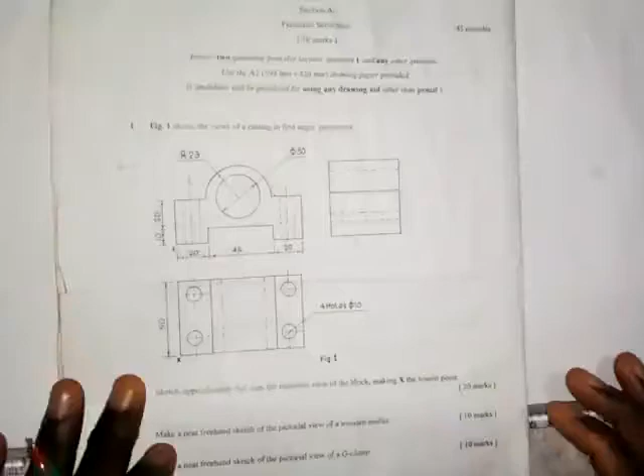All right, this is another question that you want to work on. This is given in orthographic views. These are orthographic views, and the candidates that wrote this particular paper were asked to sketch the isometric view of this object, putting these views together to get an isometric view of the object.

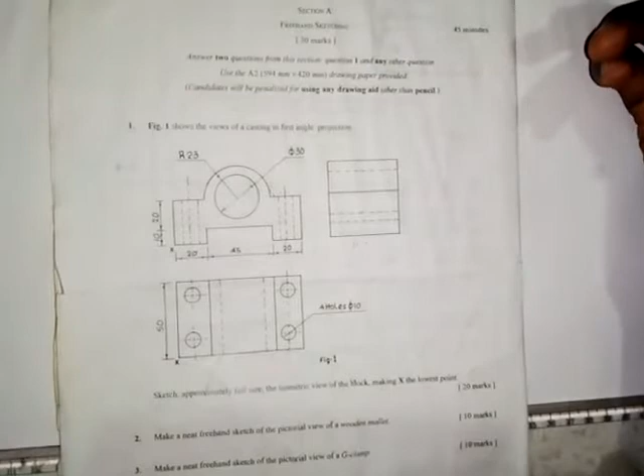So what I want to do here is to use the instrument to produce the isometric view. Looking at what we have here, we are told that figure 1 shows the views of a casting in first angle projection. Here they said sketch approximately full size the isometric view of the block, making X the lowest point.

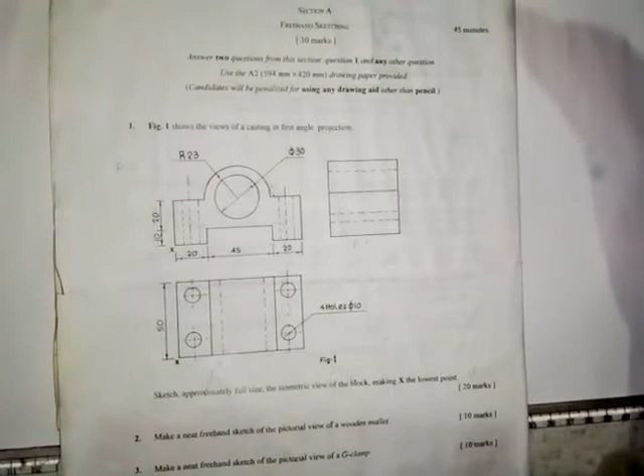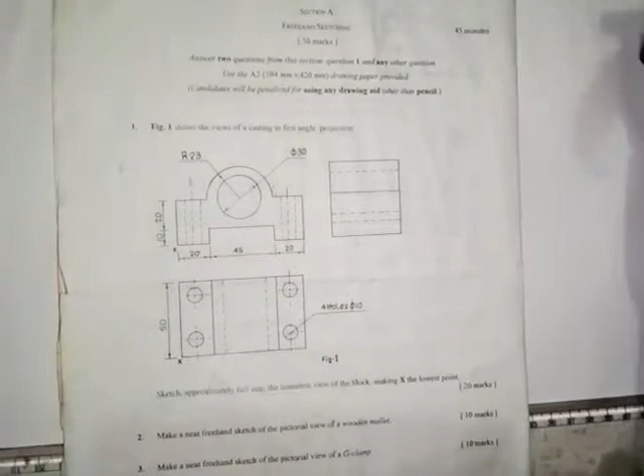So we are not doing sketching here. We are not doing freehand sketching. I've done the freehand sketching of this. Now I want to use instrument to produce its isometric view, because from experience, as I said before, I've seen where a question given to some candidate to sketch free-handed was also used in another year, where they should use instrument to produce its isometric view. That is the reason why I want to show you how you can use instrument to produce the isometric view of this object.

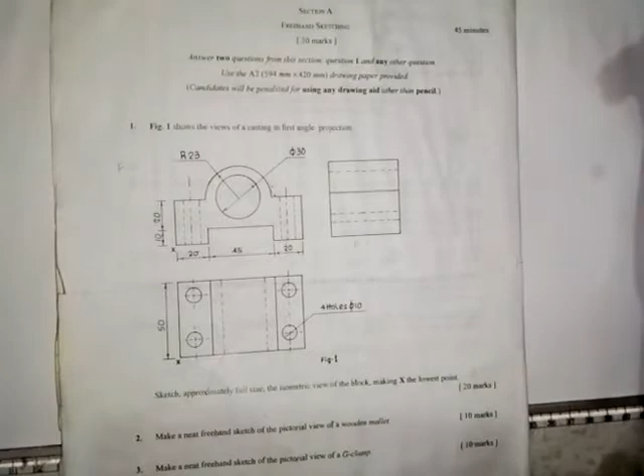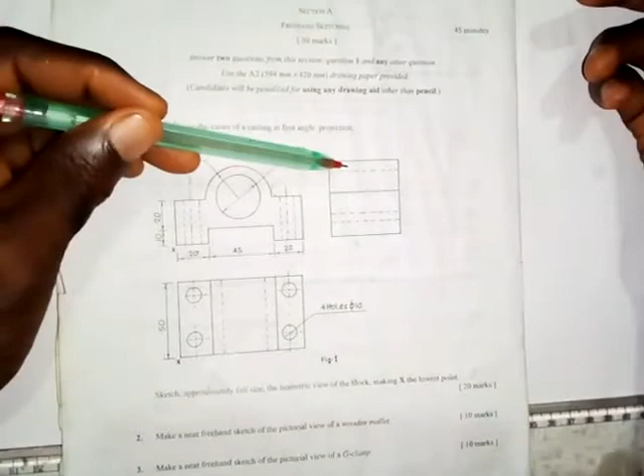Now let's look at what we are going to do here with these views given to us. As you can see, this is given to us in first angle projection. It means that this is the front elevation or front view, this is the top view or plan, and this is the end view or side view. That is what we have here.

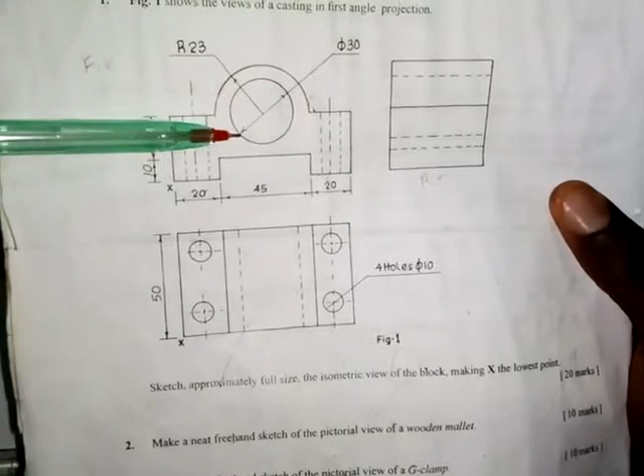Now here we have that the distance from here to here is 20 millimeters, from here to here is 45, from here to here is 20. If we add this together, this will give us 85 millimeters. The distance from here to here is 10, from here to here is 20, so the radius of this circle is 23. The diameter of this circle as given here is 30 millimeters, that means the radius is 15 millimeters for this circle, while this semicircle, the radius is 23 millimeters, as you can see here.

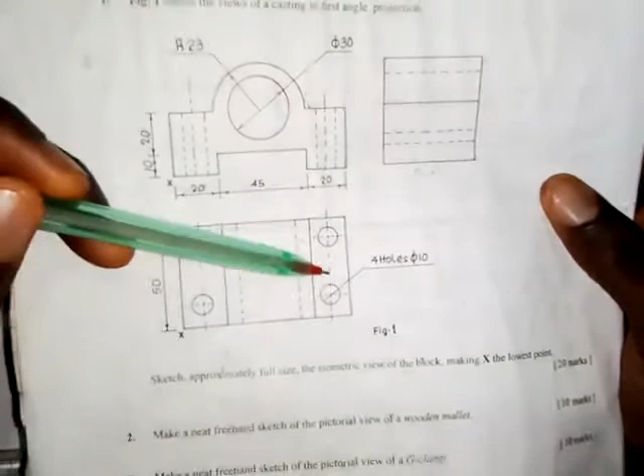Now coming down to the plan here, the distance from here to here is 50 millimeters. For these 4 holes that we have here, we are told that the 4 holes' diameter is 10. So these are the things that we have to put together to produce the isometric view of this object.

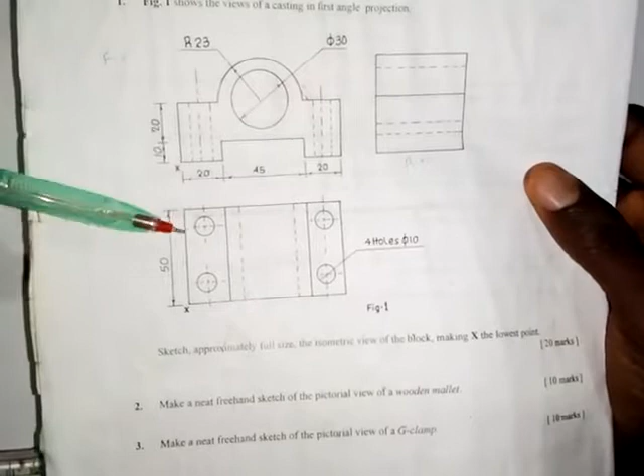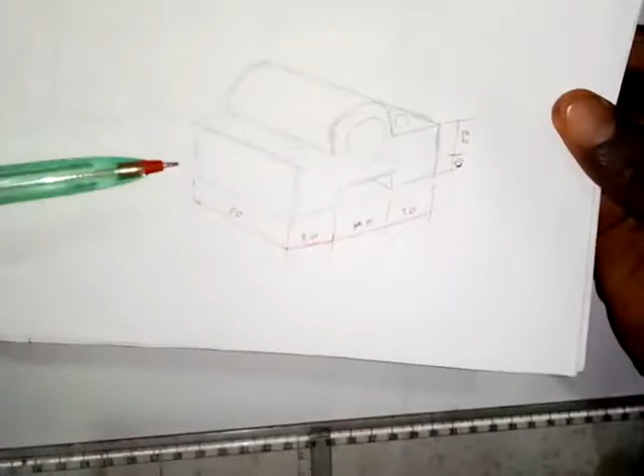In every video that I produce on isometric drawing, when we are converting orthographic to isometric, I usually say that when you are given the views like this, make sure you produce or sketch its isometric view, which will enable you to get the work done quickly. That is what I have done here. This is what we want to produce. So I'll be using this, coupled with the question given, to produce the object.

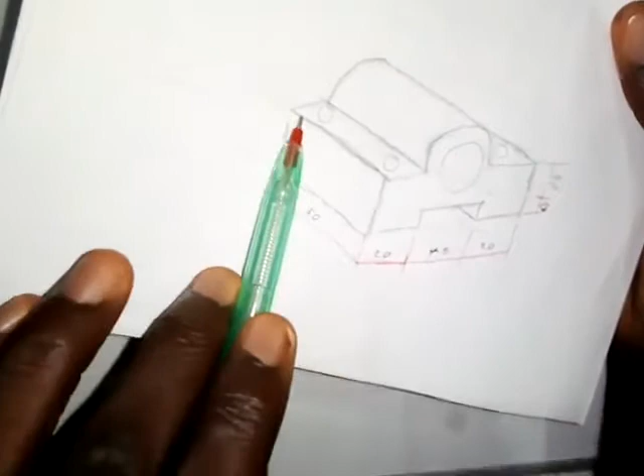So let's start. The first thing that you need to do here is to draw a horizontal line like this. Now, after that, with your 30-degree set square, the first thing I want to do here is to produce the base. Without this, I'll produce the base first, then I will go on and produce it. So let's start with the base. With your 30-degree set square, draw a line in this direction, then also draw a line.

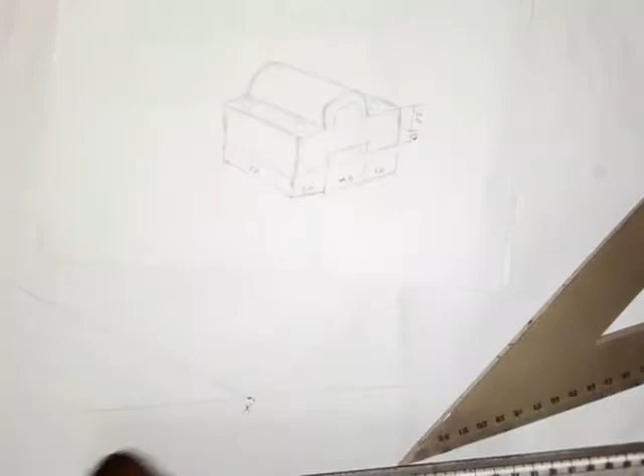From here in this direction, this is point X, which we are asked to make the lowest point. So this is where we have point X in this diagram now.

The distance from here to here is 20, from here to here is 45, from here to here is 20. So that is 85 millimeters. Take a measurement of 85 millimeters from here.

Then on this side here, this is 50 millimeters. Take a measurement of 50 millimeters from point X to the left side. Then draw a vertical line at this point X, here also draw a vertical line, and here draw a vertical line like this.

Now the height, as given here, from here to here is 30 millimeters. This is 10 millimeters, and this is 20. So 10 plus 20 gives us 30. Take a measurement of 30 millimeters here.

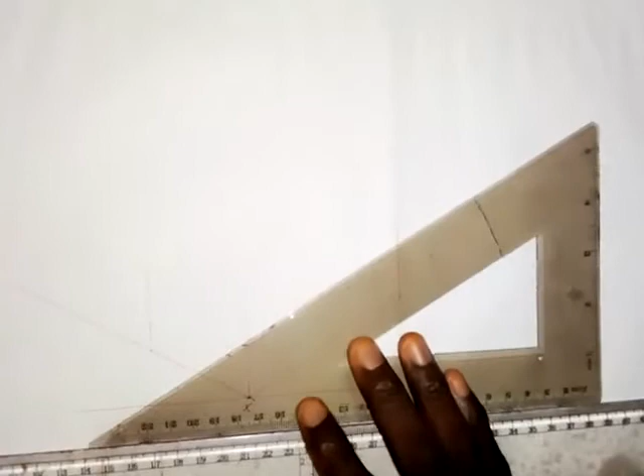Transfer this to this side. Also transfer this to this side. Then we transfer this one to this side. Transfer from here to the other side like this.

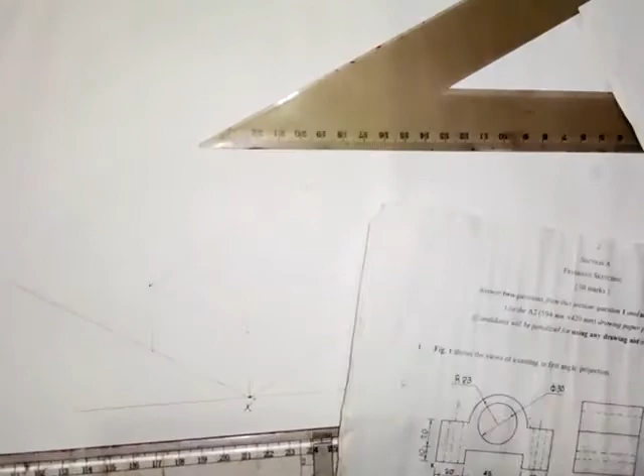The distance from here to here is 10 millimeters, from here to here is 10 millimeters for this recess. So we take a measurement of 10 millimeters from here.

Then I'm going to take 20 millimeters from this point X. So from here also I will produce, this is also 20 millimeters.

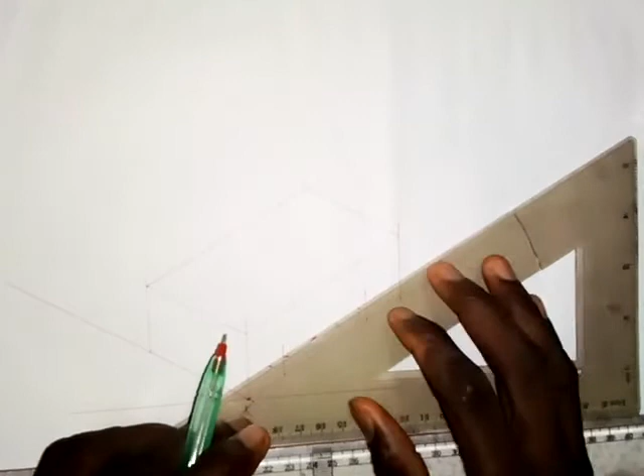We draw a vertical line, a short vertical line here, and also a short vertical line here. Then from this 10 here, so I will draw this.

Then we are going to see a line, as you can see here. So this line here that goes inward, we are going to produce it. So there it is, like this.

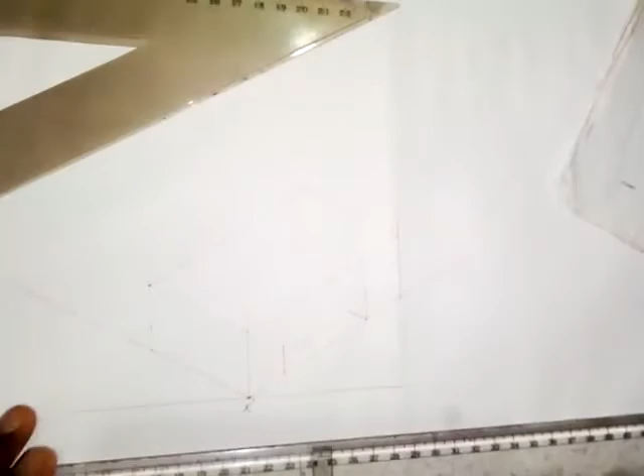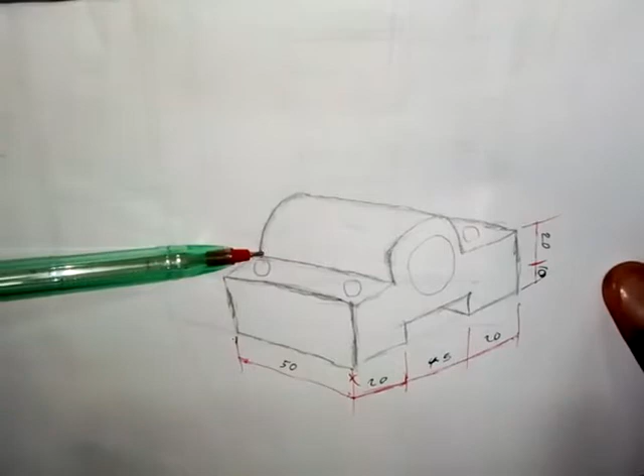The next thing I want to do here is to produce this semicircle that we have here. First of all, I will start with this part, because for this part you only see a little part of it, or small part of it. So I'll first produce this one, then move on and produce this. Later I will produce this circle.

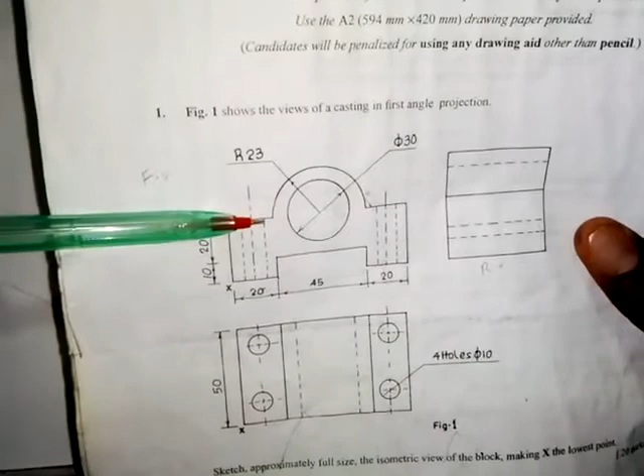Don't forget that the radius of this semicircle is 23 millimeters, which means the diameter is 46 millimeters. So what I'm going to do is, as we know the distance from here to here is 85 millimeters, if we divide 85 by 2, that gives us 42 and a half millimeters.

So I'm going to divide this into 2 to get that 42.5, so 42 and a half. So there it is. I'll transfer this to the front like this.

Then I will take 23 to the left, and also 23 to the right here. So 23 from here. So this is 23.

I'm going to erect a vertical line here, so erect a vertical line here. Here also I will erect a vertical line.

Then I will take a measurement of 23 millimeters up. So this is 23. I'll transfer this to the other side.

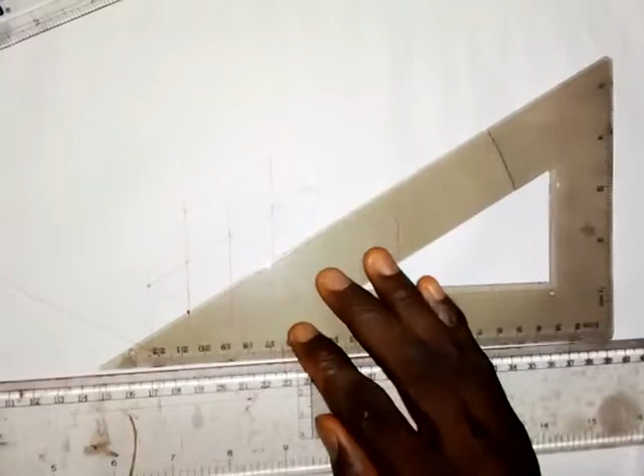Then I will take 23 millimeters down from this point, 23 millimeters. I'll transfer this to the other side, transfer this to the other side like this.

The next thing I'm going to do is join this point here, this middle point, with this point. Here, I want to produce that semicircle.

So then this point I will join it to this point. Join this point together with this. Then I will join this point here together with this point.

The next thing I'm going to do here is to take my compass, putting it at this point here, putting it at this point and extending it to this point.

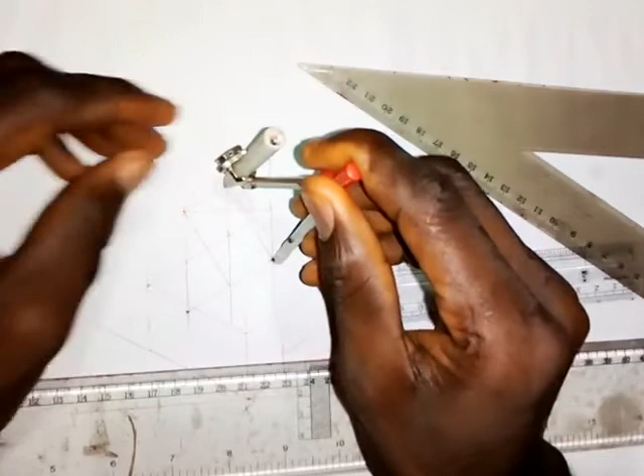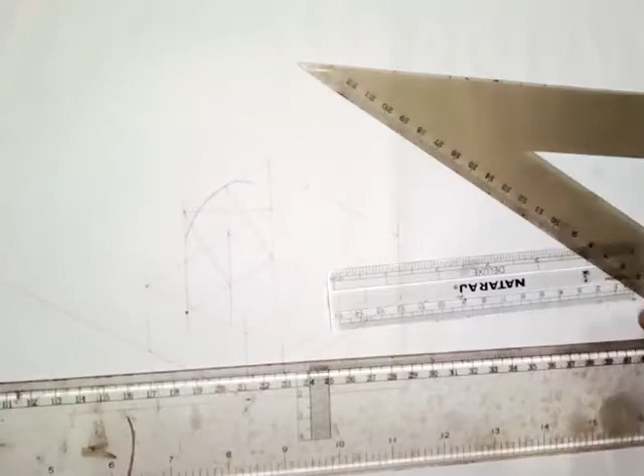So I'm going to draw a curve like this. So I believe you can see the way I did it. So then I will put the pinpoint of my compass at this point, extend it here. Then I will produce just a little part, I don't need it all. So I've drawn part of this, the little one that I need. So here I'll just bring this down to this point here.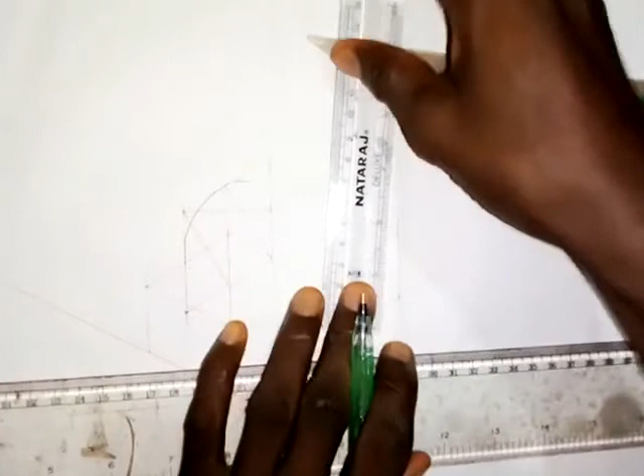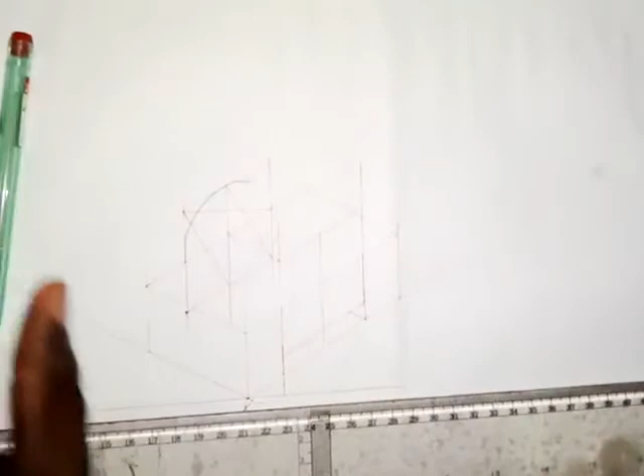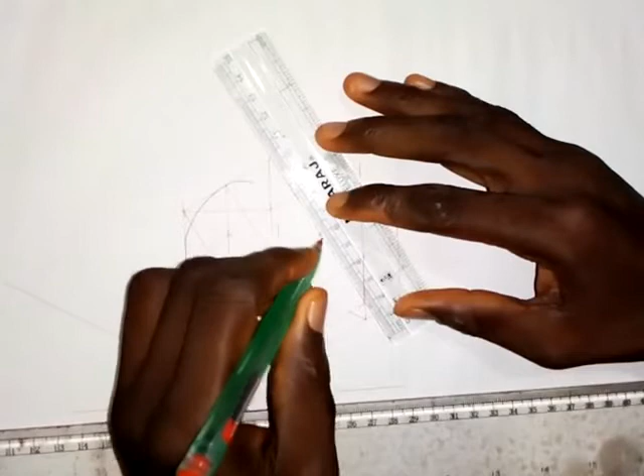Alright, so the next thing that I want to do now is to produce the semicircle at the front. So I will do the same thing that I did for this part, just to produce this square here. So I will do that while I pause the video. Alright, so I've produced the square here. So the next thing that I want to do is to join this point in the middle here to this point here. So join this together, and I will join this point and this point together like this. Then I will join this point here, this point here, together with this.

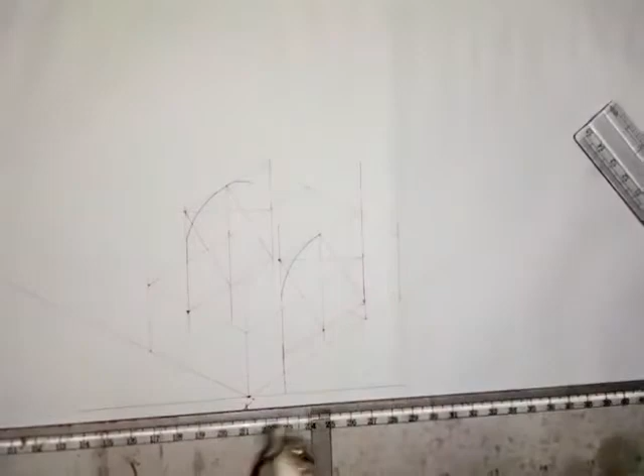Alright, so then the next thing that I want to do here is to produce the semicircle. So I put the point on my compass here, extend it to this point here. So I draw this like this. Then I will put the pinpoint on my compass at this point here, because we are going to see the whole of this semicircle on this part here. Okay, so we have this. Alright, so we have drawn the semicircle.

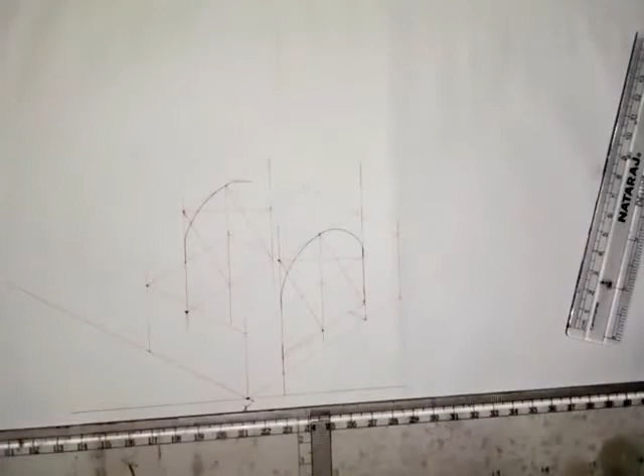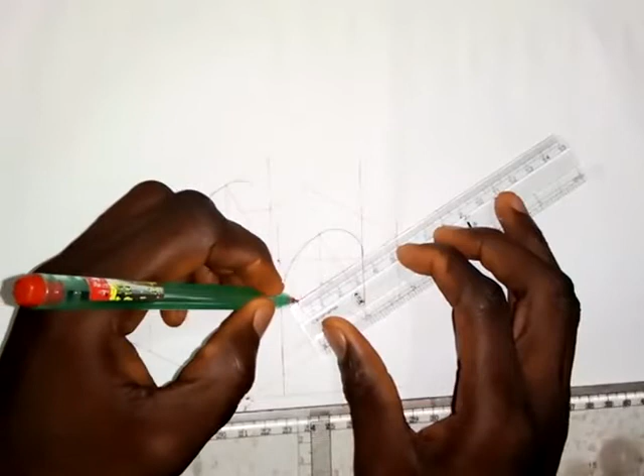So the next thing to do is to draw the circle itself, that is this circle. We have to draw this circle, and we are told that the diameter of this circle is 30. That means the radius is 15 millimeters. So from this center here, we take 15 millimeters to the left, 15 millimeters to the right. Then we take 15 millimeters from the center, 15 millimeters down, and 15 millimeters up. Then we form a square.

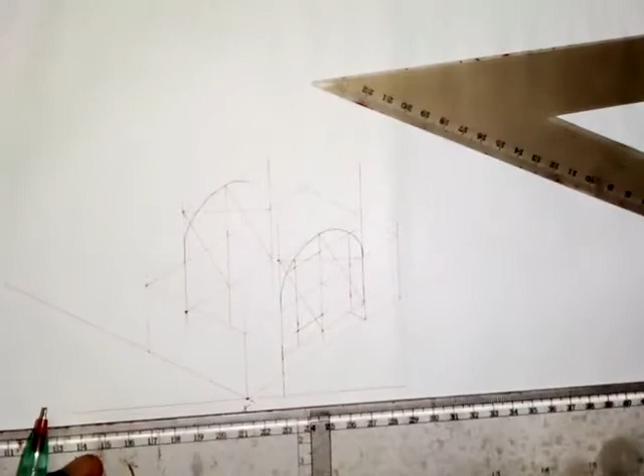So we form a square like this. So I draw a vertical line here, like this. Then I will draw this line this side, and this line to this side. I'm not sure, I'm looking at this as if this is less than 15. It is less than 15. This is where we have 15. I think it was a mistake.

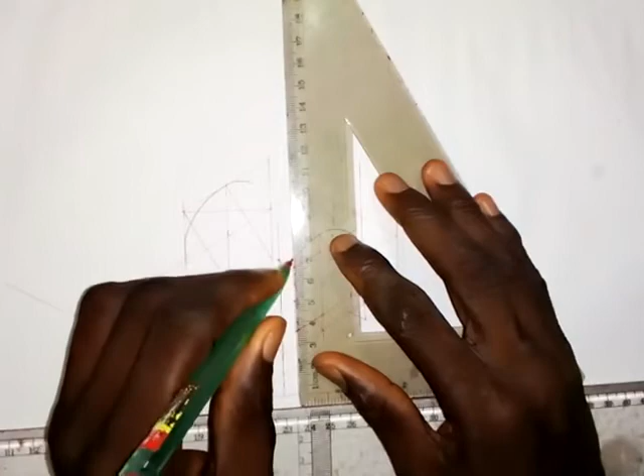Okay, so I need to join this. So we have these 4 points now. So here, let me call this point A. I want to use the 4 center method. This is point A, this is point B, this is point C, and this is point D here.

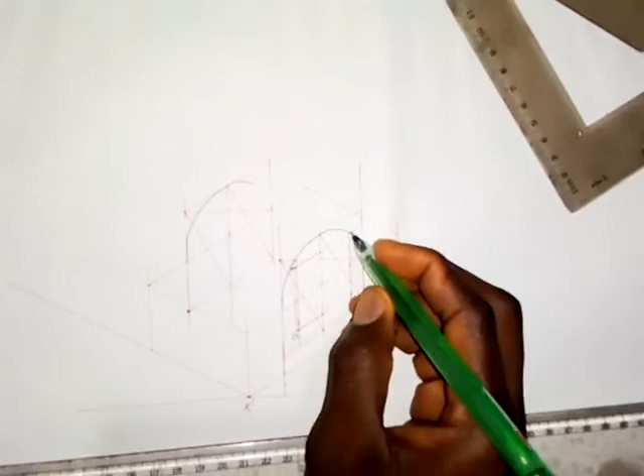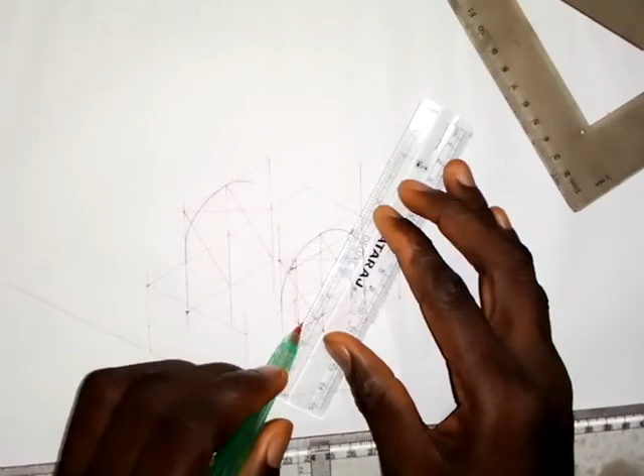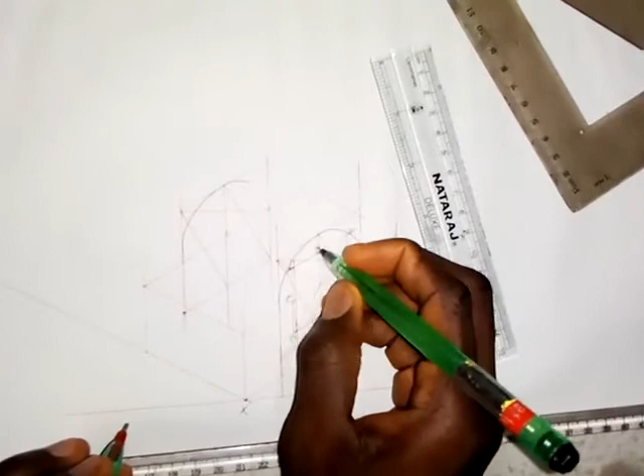So I will join B and D together, the straight line. Then I will join. So this is point E, this is F, this is G, and this is point H. So I will join C and H together. Join C and H together. Then I will join C and E together. So join C and E together, so the work may look rough.

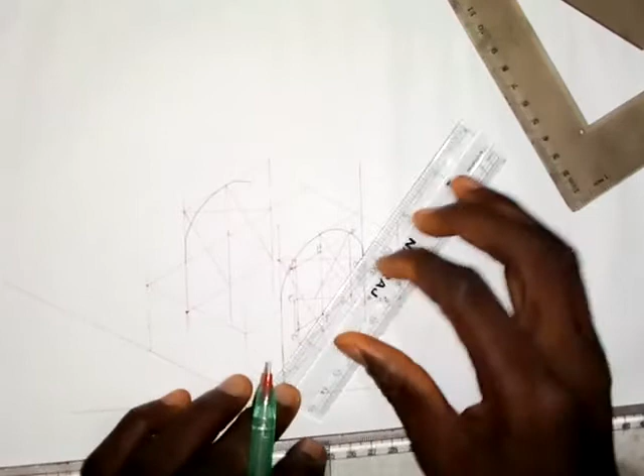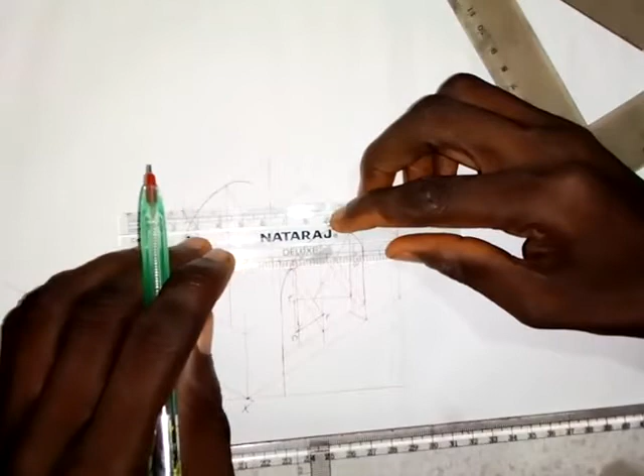Joining CE together. Then I will join... so I will join GF together. Sorry, I will join AF together. So join AF together like this. Then AG, I join AG together.

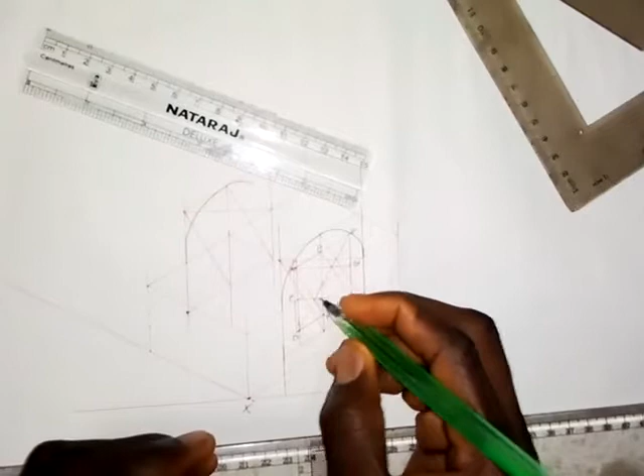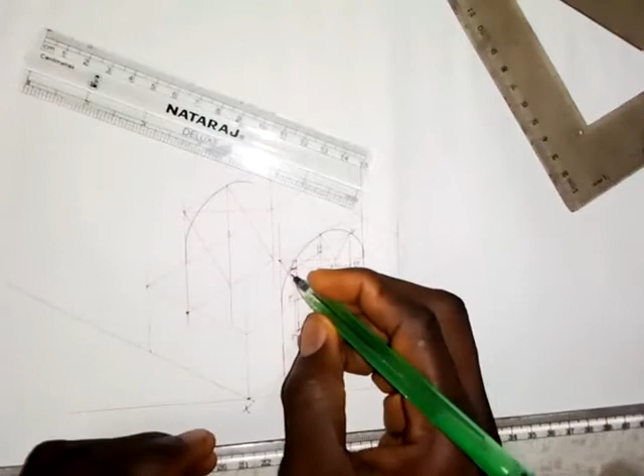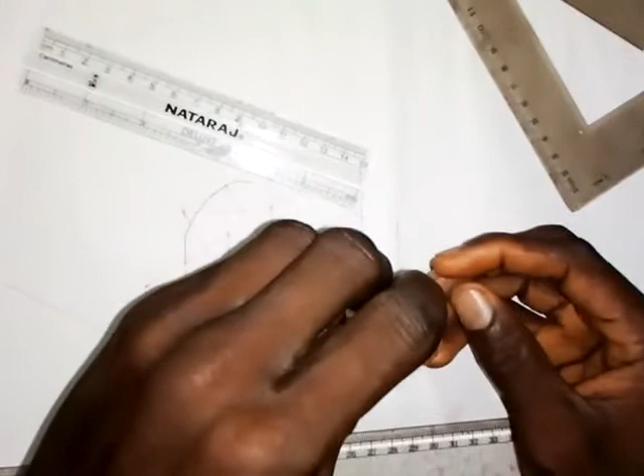Okay, so we have the 4 centers now. So this point here, and this point here. So this is center 1, this is center 2, this is center 3, and this is center 4. So we have those centers. So I put the pinpoint on my compass at this point here, extend to F here. Then I will draw an arc like this.

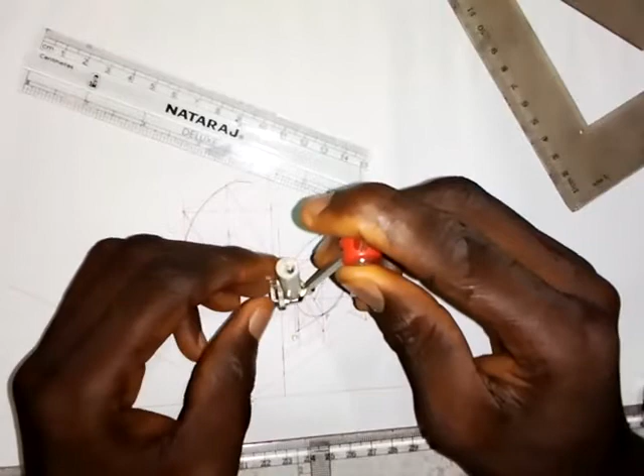Okay. So draw an arc like this. So the same radius at this point 2 here. Extend to, so I will draw an arc like this. Then I will put it at this point A here, which is point center 3. So extend it to F, then I will draw an arc. So draw an arc like this. Okay. Then I put it at this point here. So extend it here. So draw an arc like this.

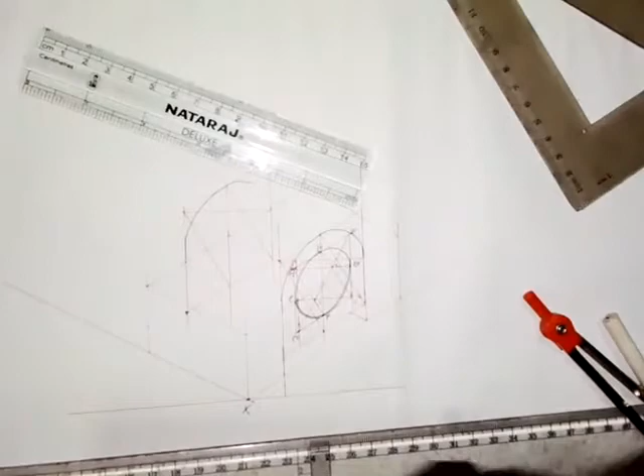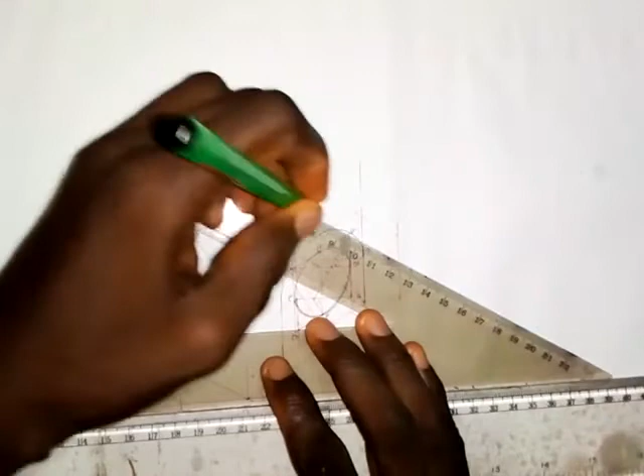Okay, so that is the circle. So we have drawn the circle. So the next thing that I'm going to do here is to join this point together. So I join this together with this. So join this together. Okay, so the work is coming out little by little. Then this point, I will join them together. So join this point together like this.

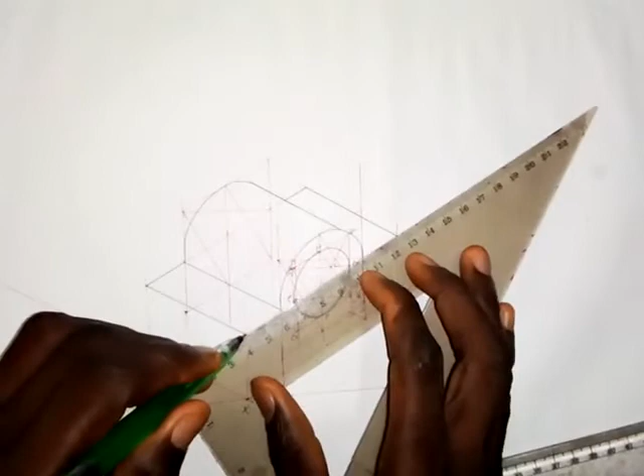Okay, so let me bring out what we have done so far. So that's what I'm doing now. Okay. So this will be a thick line. This will also be a thick line. This is a thick line. So this will be a thick line.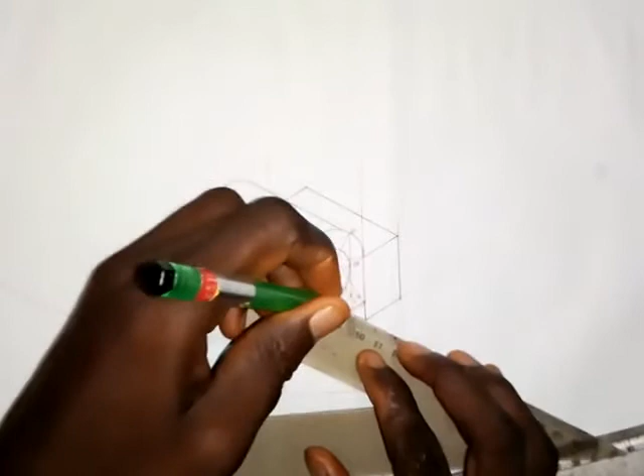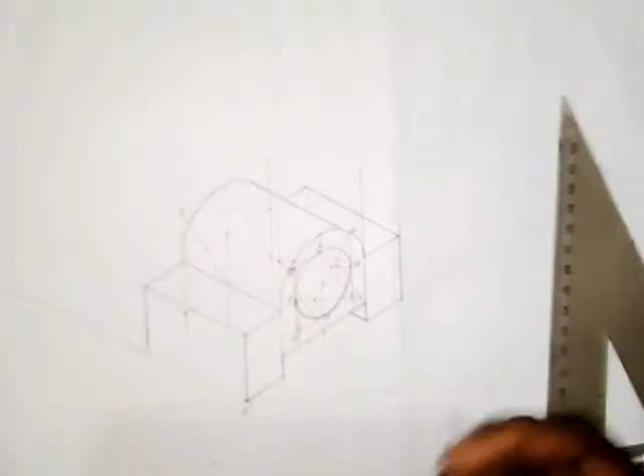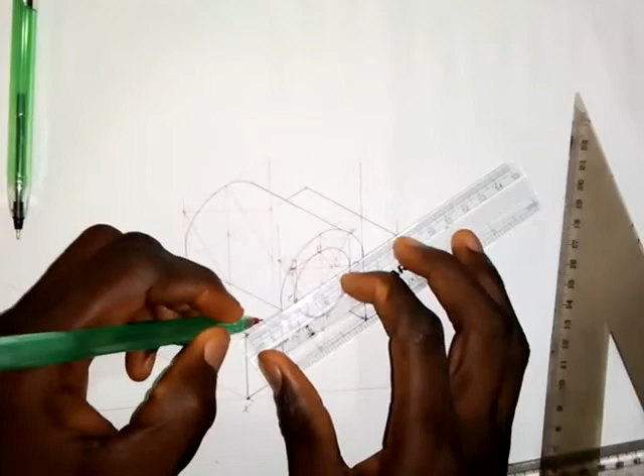All right, so the next thing that we want to put here are these circles. We want to put these circles there. So don't forget that the diameter of the circle is 10 millimeters. So we are going to divide. So the distance from here to here is, okay, sorry, this is 20 millimeters. So 20 millimeters by 2, that is 10. So this is 10. So I will also take 10 millimeters here. Okay, so this is 10 millimeters.

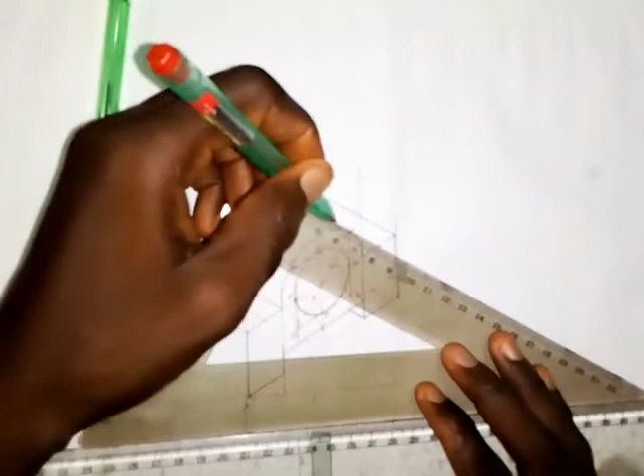So I will take this. So take this to this side. And here also, I will also take this backward. Okay, then I will take 10 from here, so this is 10 millimeters. I will also take 10 from here, so 10 millimeters. I will transfer this. So this down here, this goes, and also this, I transfer it, and it goes backward.

Then from the point of intersection, I will take 5 millimeters to this side, 5 millimeters here, and here also I will take 5 millimeters. So this is 5 millimeters, and this is 5 millimeters. So I will transfer this to the other side.

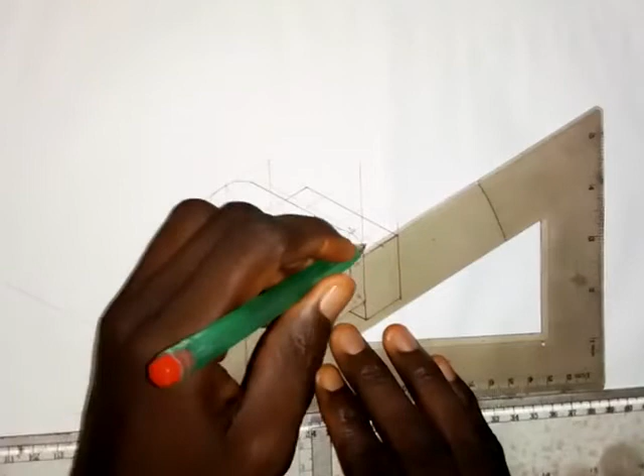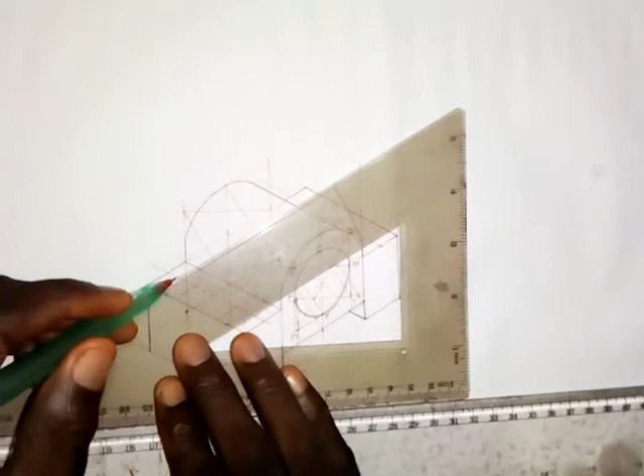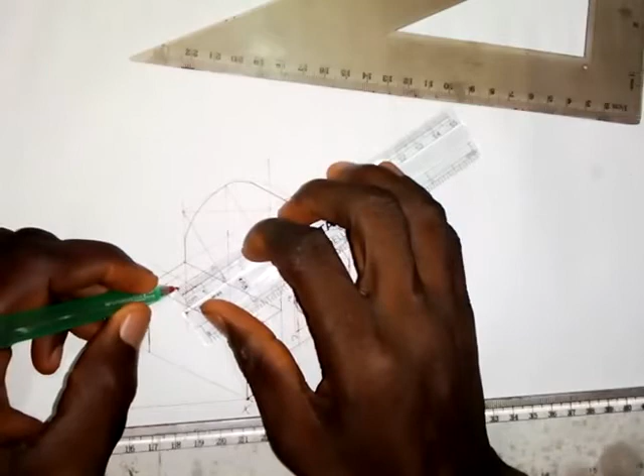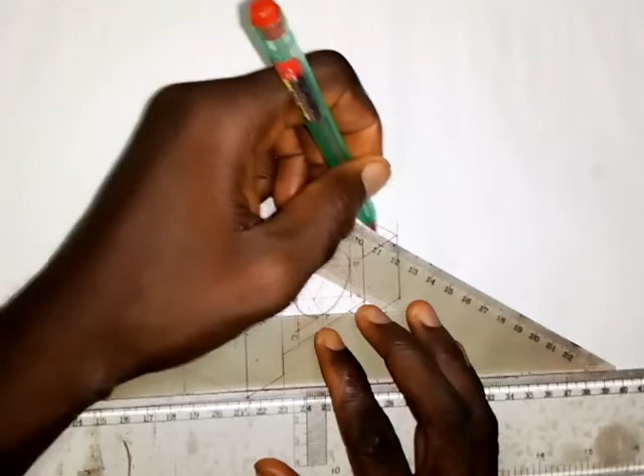Okay, then I will also take 5 millimeters. So I should have done that before. So this is 5 millimeters, and this is 5 millimeters. So this is 5 millimeters. So I may not need to draw the whole of that. So then I will transfer this here, and this. So transfer this and take this to this side. Here also I will.

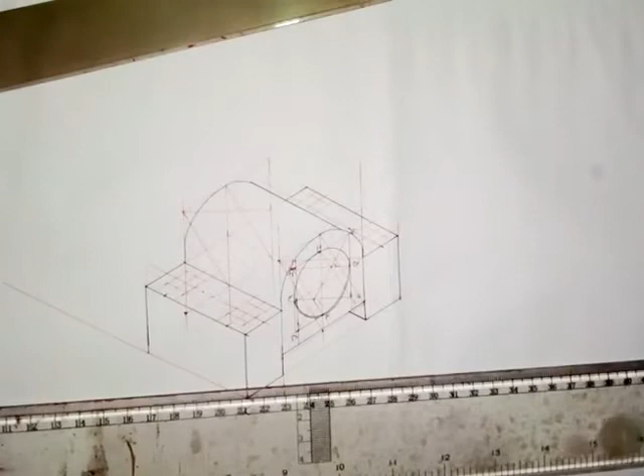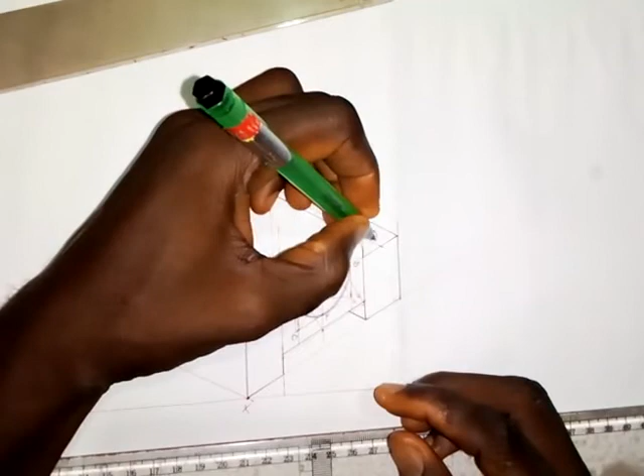Okay, so now I form the square, so I can draw the circles now. So I'm going to use my hand to draw the circles. Don't forget that an isometric circle is an ellipse. So because this is small, I can easily use my hand to draw it like this. So for this one, part of it will be hidden. So you can still see this like this by this one. Okay.

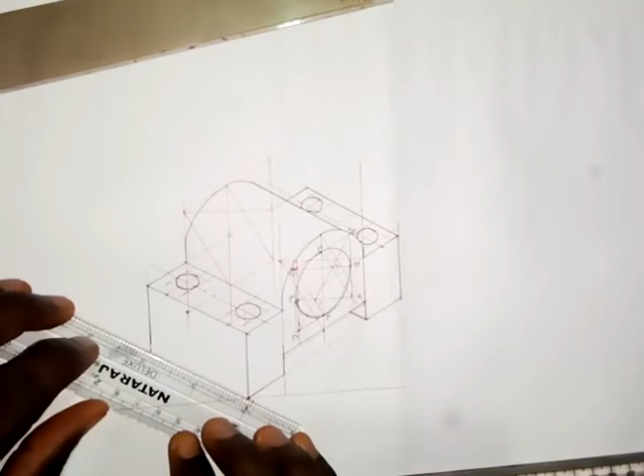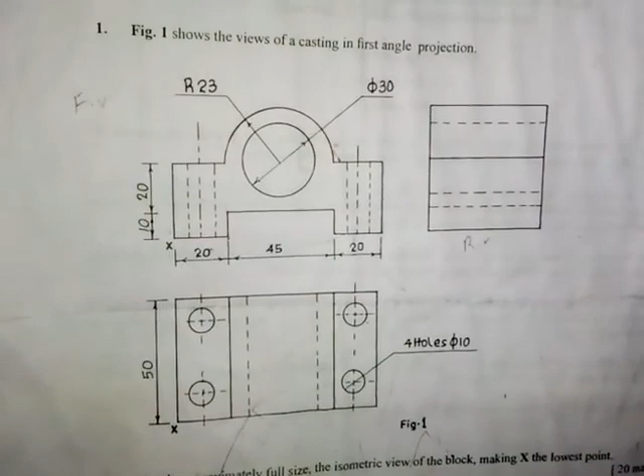Alright, so we have the object in place now. So I need to make this line a thick line. Alright, so this is the object. So we have drawn the object with the use of our instrument. So all you need to do is to practice. So this is the question given to us. So you can screenshot it so that you can practice it. So this is what we get when I sketch it. So this is the sketching, and this is what I use the instrument to produce, which is also the same as what we are given.